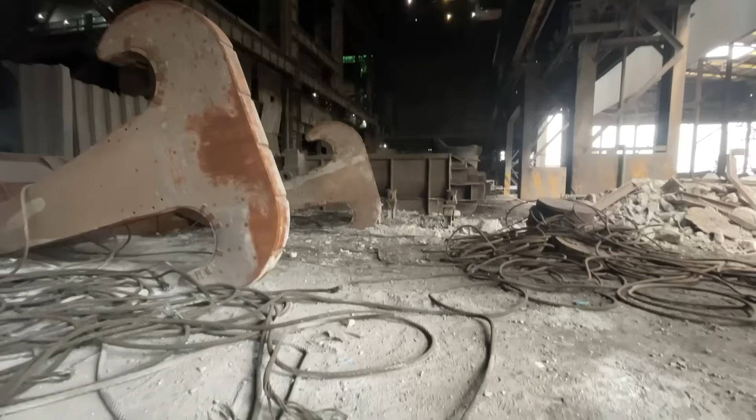The story we've been telling over the last 3 years through these podcasts and these videos is of a new industrial revolution. Where steel communities were originally founded around iron ore and coal, the opportunity going forward is to found those steel industries around renewable energy and the access to native scrap in the UK.

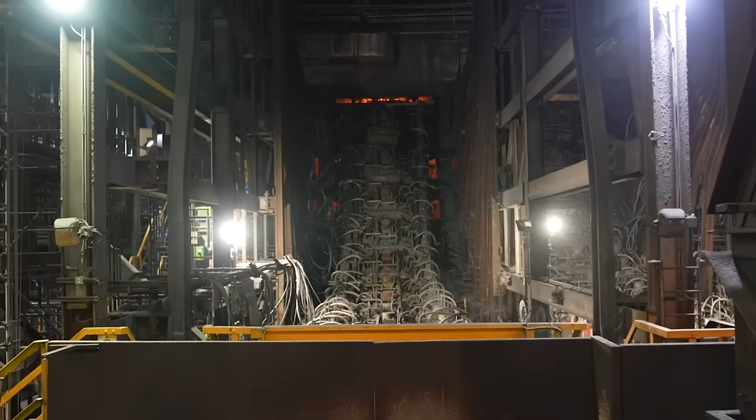Now, we all know now that the company here is investing £1.25 billion in a program of low CO2 steelmaking, and lots of people will know that that involves the introduction of electric arc furnace steelmaking technology here. But of course, on top of that, there's other things we're doing. So there's a life extension project for the casters, there's an investment in the crop shear and coil box in the hot mill, and there's a brand new pickle line as well as part of that investment.

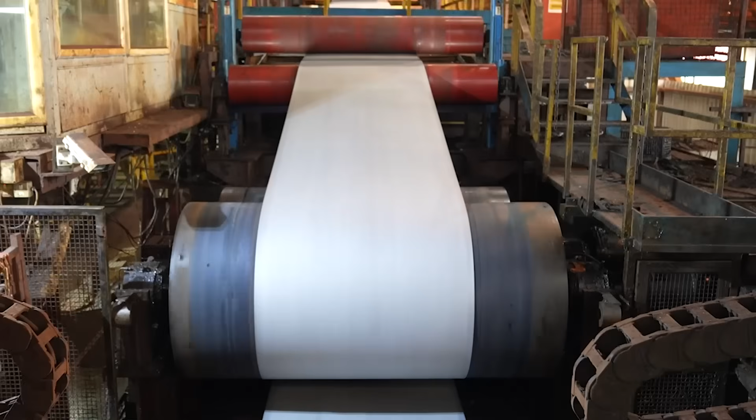This is one of Tata Group's mega projects across the world. There's Agratas, the battery factory across in Somerset, and the investment in low CO2 steelmaking here in Port Talbot. So I've been waiting 3 years really to make this podcast because we've been anticipating that project starting. Now we've had the contract signed with Tenova, got planning permission from Neath Port Talbot Borough Council. There's a few more things to sign off before we can get spades in the ground on the project in the summer, hopefully in July.

And so today we're going to be telling you the story, or the first part of the story, about that investment in electric arc furnace steelmaking. And who better to show us around what that's going to look like than the program manager, Peter Jones. Peter, listen, I've been really looking forward to this. Thanks so much for joining us and spending some time with us today. And I think we're going to walk around pretty much start to finish of steel being made on the site going forwards. But people may not have met you before, won't know much about you, Peter.

You're another lifer in the industry. Tell us a bit about how you got to this place today. Well, going right back to the start, I went on a trip as an undergraduate to the hot strip mill here many years ago, in 1990 I think it was, and I was hooked, strangely enough. It didn't take much really then to move on, and I joined the company in 1991. I actually started in the tin plate works in Ebbw Vale. I think you were there for a little while. Yeah, that's right. And really moved through the company through engineering jobs, operations jobs. Ebbw Vale has since disappeared, but I've worked at Trostre, and I've worked pretty much over most of Port Talbot Steelworks as well. Yeah, and of course you're a works manager in the steel plant where we'll be heading to a bit later on, so you know that place as well as anybody.

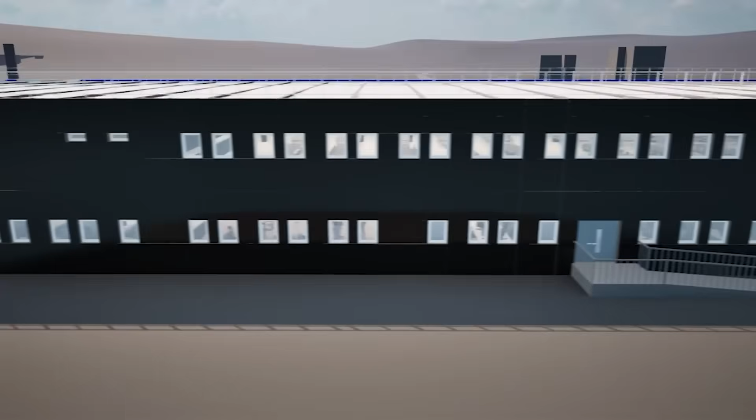You absolutely do, but there are points out there on the boundary of the town called receptors, and they're listed within the planning documentation, and we need to make sure that our noise levels are not above those that have been set previously from the site. So that has all been done and clearly demarked. And as I said, it's a massive area. There's still quite a lot of work to be done here from the summer to get this place ready to receive scrap. What will this place look like in a year or so's time?

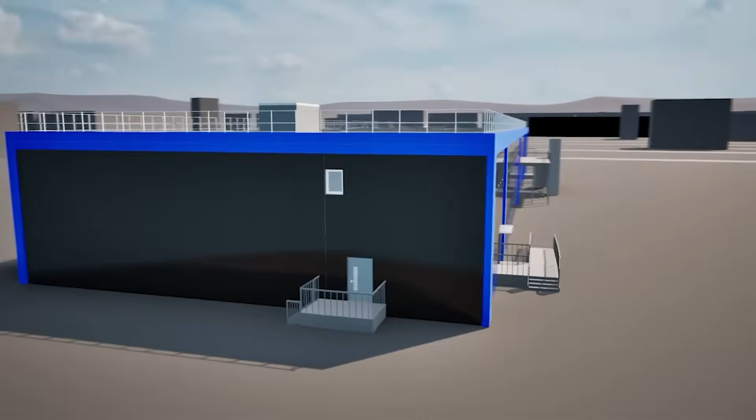Well, this has got a couple of uses for us, believe it or not. So firstly, when we get to the point where we're getting ready to mobilize the site, you'll end up with all of the amenities and the offices for the construction operations here, and all the car parking for the contractors and people who are working here. It's a short walk to the plant from there, and it's important that we give the people working on the construction project the best possible amenities and quality of working environment. So that's really important.

This area here, as we progress the project, we'll end up concreting an apron that goes all the way down the line so that we can use the machines to take the containers off the wagons. So this area has got roadways, a road layout. Wow. There is some processing equipment that we require to deal with material coming from our own existing operations, where scrap is yielded off the operations. It's incredible, really, isn't it? Because in my mind's eye, I was like, it's just a field, and you can tip a load of scrap there and move it over to the arc furnace. But the amount of work that's required is huge.

Yeah. As I said at the beginning when we arrived here, Peter, over your shoulder we can see the existing steel plant and the existing caster building. That's where the electric arc furnace is going to go. Now, that's quite a way away still, isn't it? I guess the scrap's still got to get from here to there. Yeah. Why don't we go to that end? We'll go to the BOS plant outside, and then maybe you can talk us through how it's going to get there. No problem. Great, let's go there then, thanks.

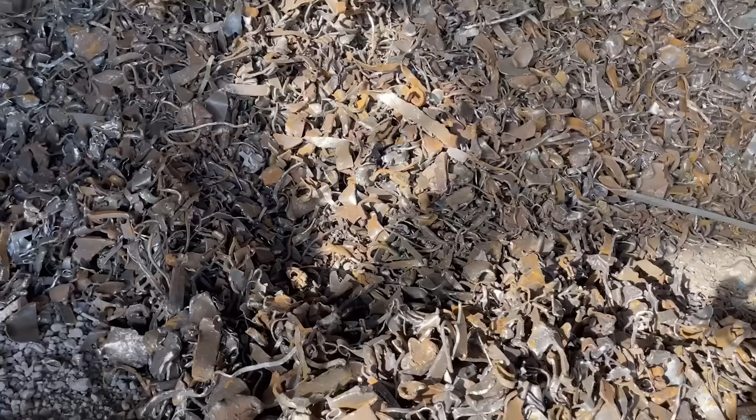Yeah, and I've seen the engineering drawings, and these two car parks in front of us for the casters, they're all going to have buildings and units on them, as you were describing. The building in front of us, which is the existing steel plant and casters, is where the electric arc furnace is going. There's a big shed on the left with a blue roof, which is currently the scrap bay. That was the old BOS plant scrap bay.

So on an integrated steelworks, the blast furnace operations, you would end up putting 18% scrap into the iron to make the steel. So that whole building was doing that. Now, obviously, what we're going to do is put a huge percentage of scrap in. So that's 70,000 tonnes a week that has got to be fed into the arc furnace in that area.

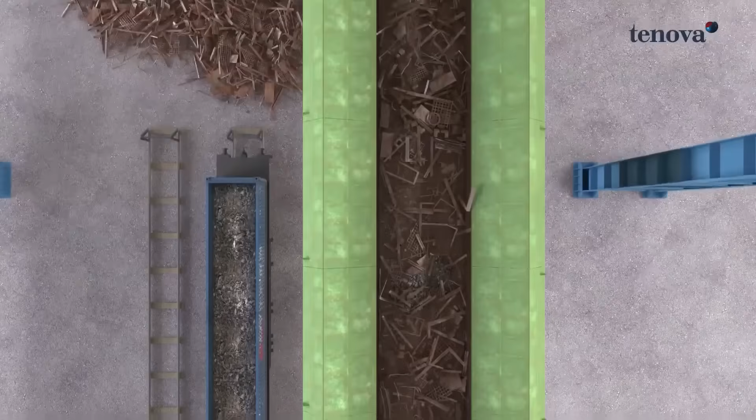So actually what we're going to do is knock down that building, and that whole line along the side of the lagoon is being flattened so that we can put a huge Consteel conveyor system in, and that will continually feed scrap to the furnace, and that really raises the throughput of the plant massively. So that's why we've chosen that design of plant to achieve that throughput.

Yeah, because I've spoken on the podcast before. My early career started in British Steel Stainless with an electric arc furnace. It was bucket fed. That's right. Electric arc furnace, and this is a conveyor.

And as you said, I've seen the drawings, I've seen the plans. People might be listening to the podcast and watching the video and say, "Oh, they're going to have a conveyor and they're going to put some scrap on it." This thing is massive, isn't it? It is, yeah. That whole construction, which goes alongside the lagoon as you described, feeding into where the electric arc furnace is going. Can you give us an idea of the scale of that?

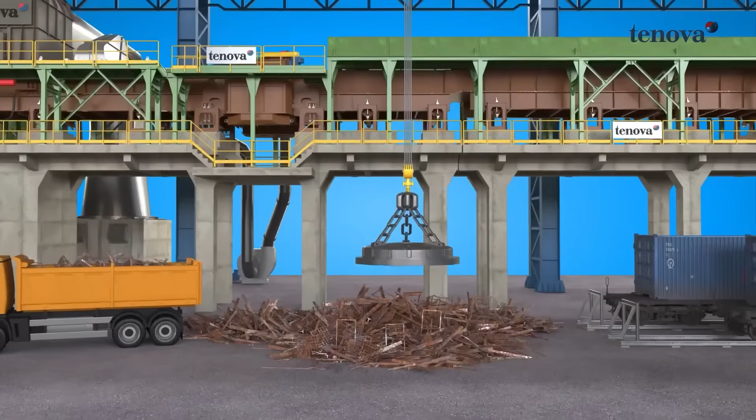Well, it'll be about 300 meters long for that conveyor. The actual building is, I think, about 20 meters wide. And we can store scrap inside that building, but also we have other conveyors that bring the scrap into that system. So that building also will have a couple of big cranes in there with magnets on to lift scrap.

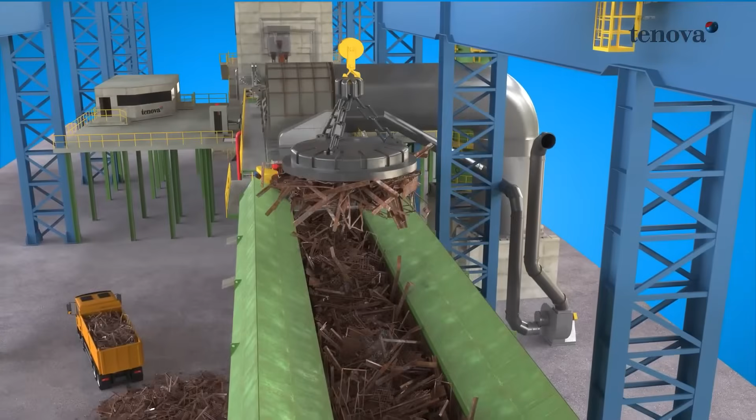So there's numerous different technologies that are used there to get the scrap to the furnace, and also to make sure that we understand how much scrap is getting to the furnace. So we'll weigh the scrap as it moves down the system to make sure that we're continuously feeding the process. The plant will be able to do about 400 tons per hour of scrap, to give an idea in terms of size.

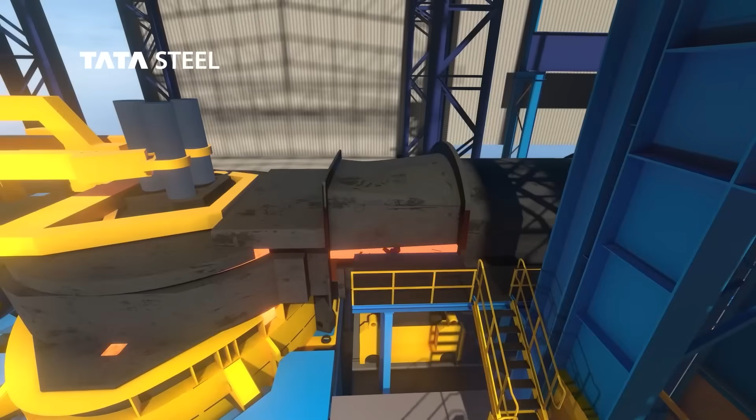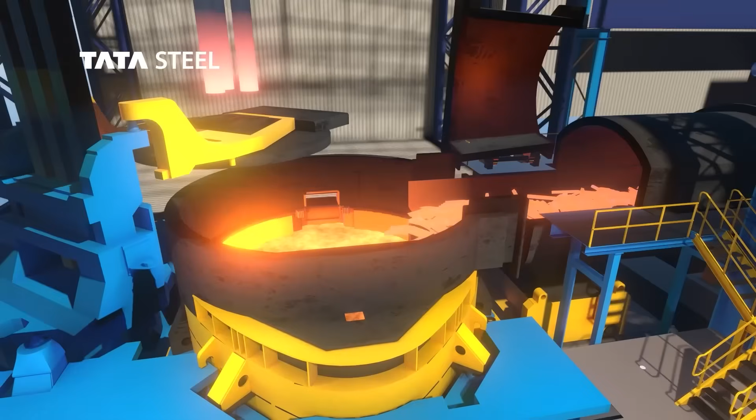And it's an incredible thing, isn't it? And I think I'm right in saying you mentioned that scrap gets heated before it goes into the electric arc furnace. That's integral. I guess that's just outside that building there, is it? Or is it within the building right next to the furnace? It's actually coming out into that new building, so that scrap will be preheated before it goes in. That saves us a little bit of energy in the process, which is obviously a good thing. Electricity as a result.

In terms of the rest of that bank, it will also be taken away to put a new fume treatment plant on that bank as well. At the moment, the team over there are removing about 5,000 tons per day from that bank as part of a drainage scheme that we're doing on this area. Yeah, this whole landscape is going to change radically. Huge.

Said the lagoon is going to stay, and I'm delighted because it's a beautiful place to stand actually and look across it, and it'll be fascinating to see that. Yeah. I guess the next part of our journey, Peter, is to go over to the steel plant and go inside where the electric arc furnace is going to be built.

Because that whole bay that you can't really see from this perspective, that whole bay going back to where the hot iron used to come into the steel plant, all that bay is changing. Right. It's all going to be used, yes. It'd be fascinating to hear from you what's going in there alongside the electric arc furnace. So, can we go in there now? Of course. Great. Perfect. Let's go.

So Peter, we're now stood in the bay where the electric arc furnace is going to be built. Just on our left is that blue shed we described before, which is the scrap bay that used to operate. And behind us I can see all sorts of stuff. There's the old scrap car there. There's some hooks for the ladles. There's a ladle in the background. And I guess where that ladle is, is pretty much where the arc furnace is going to be.

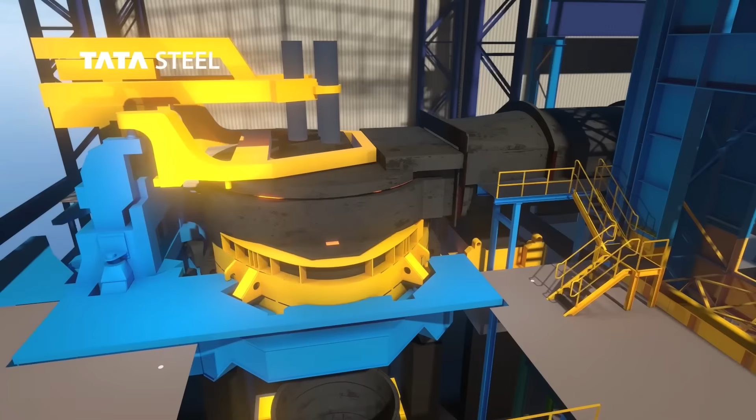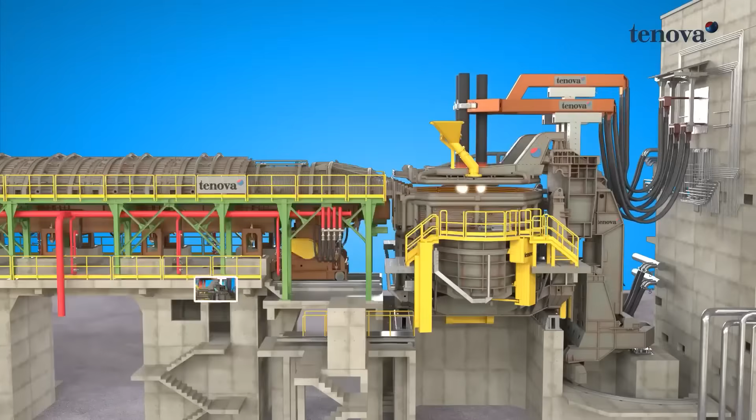And the furnace will tilt one way and the other, one to tap and one to slag the furnace off to remove all the impurities from the melt. Yeah. And then above that will be the floor where we'll operate the furnace. And further above that again, you'll have the mast. So the furnace has a mast which holds the electrodes. Of course, yes. And those electrodes move up and down into the shell of the furnace to create the arc.

And so the frame of this building stays. I mean, we're looking down there. It must be best part of 100 meters to the end of the building, and the building looks like it's 20, 30, 40 meters high. It is. That's all going to be full, but the frame's staying. That's right. This plant was built in 1968. It's a very, very robust building, and obviously we're checking it, and it has had lots of checks done to make sure that it's suitable for further duty.

But we're also going to extend the building out that way as part of the development to provide more space on that side. So this area has got a huge amount of work going on in it at the moment, as you can see. As you said, here are the old hooks that used to pick up the 500-ton ladles in the bay. And all of this is going to be cleared now, ready for construction to start in July.

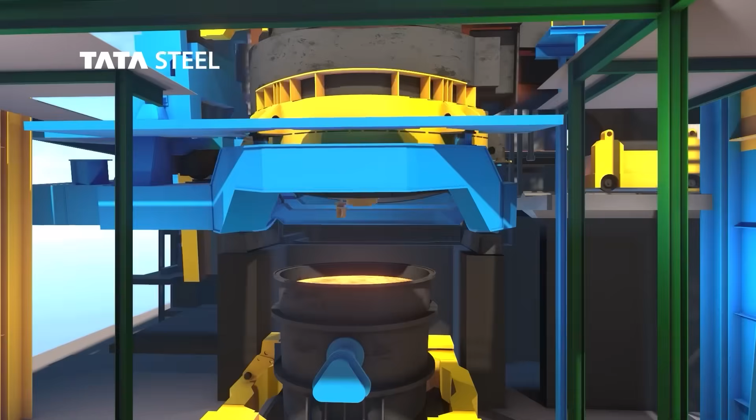And where we're standing, Peter, am I right in thinking that the ladle, once full of 300 tonnes of liquid steel, comes up towards us? It does. And then what happens to it? So underneath the furnace, the ladle will sit on a car, and when that ladle is full of 300 tonnes of metal, the car will come out from underneath the furnace. We'll pick it up then with one of the large 500-ton cranes here.

And then we will transport that down the bay to this area over here, and then bring it through into what we call the teeming bay. And in the teeming bay, that's where we do all our secondary metallurgy. That sets the grade of the steel, it sets the temperature, and then we can progress that into casting.

Yeah, and I'd like to walk through there in a minute, because I didn't mention it earlier, but part of this investment is not just the electric arc furnace, but two ladle metallurgy furnaces, which is the secondary steelmaking, which is across in the next bay, in addition to some of the assets that we currently have in there.

So let's take a walk across there. Before we go, I'd like to go up onto the stage, the existing BOS stage, because I want to talk to you a bit about this concept of having a spare shell for the electric arc furnace, because I think a lot of people will struggle to understand that. But it'd be interesting to see where it's going to go and how that's going to work. No problem. So I guess if we go that way, that's right. The stage. Let's go. Yeah, perfect. Thanks.

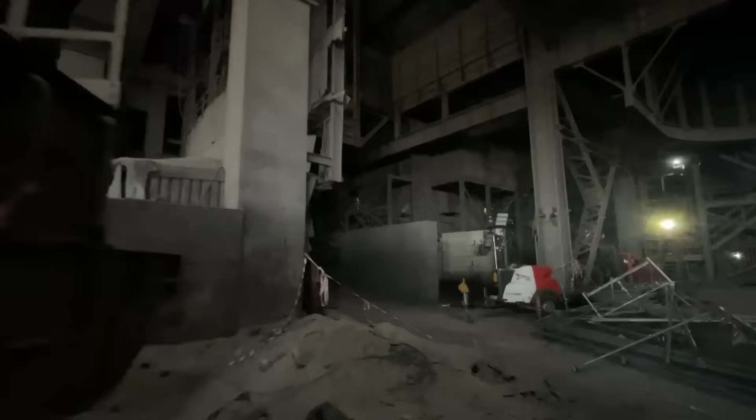So Peter, a little bit out of breath, we've climbed up from the bay where the electric arc furnace is going to the stage. So this is where the two BOS converters have been operating for as long as we've known them. Obviously now ceased operation. But this other end of the bay, the north end, where traditionally hot metal came from the blast furnaces and the torpedoes was put into a ladle, desulfurized before it went into the converters. This end of the bay is not redundant, is it? There's some stuff happening here as well. Tell me what goes on here.

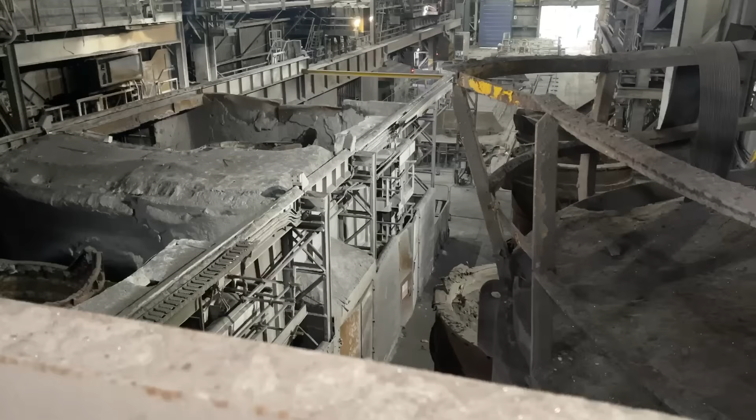Believe it or not, we need the entire length of the building, and it's a huge building. It's a cathedral, isn't it? It really is. In the south end of the building, as you said, we've got the electric arc furnace. You're going to be moving hot metal ladles when the plant's running. But then the rest of this bay is required for other aspects of maintenance of the plant. One of the biggest ones is that we have to, on a very regular basis, change out the shell of the furnace. That shell at different times can contain 480 tons worth of metal. And the refractories inside that shell are very thick, but they do wear from that kind of intensity.

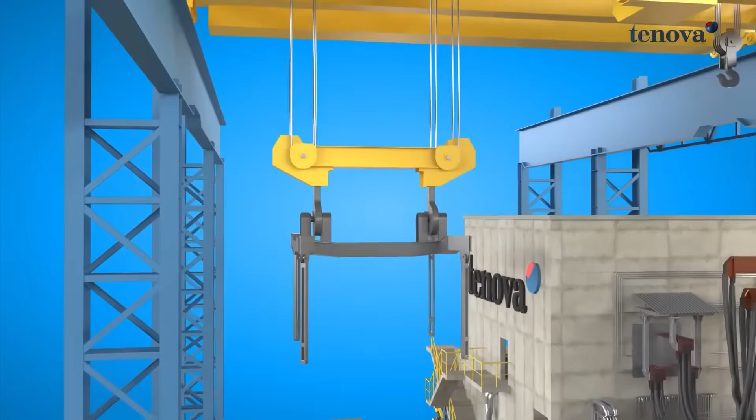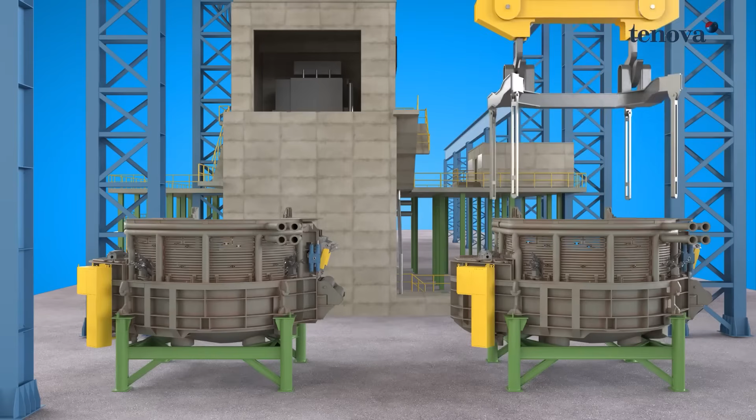So every couple of weeks, when the plant's in full production, we have to change that shell out complete. Wow. And then we put another one back in. The crane that we'll be using will be rated for that, something like a 580 ton potential lift. And that will, every 2 weeks, change the shell, put a new one back in with new bricks in, so that the thing is safe and we carry on running. So it can be done very quickly because it's designed for that. It allows us to change a shell in less than 8 hours. That's the way that this will be done.

And it's interesting because you talk about it as a shell, and people might think, oh, like a shell of a crab. But when most people think of an electric arc furnace, they're probably thinking of that shell. It is kind of the whole furnace without all of the... Literally the whole furnace comes out. So you're left with the frame that it sits in, that tilts it. As I said, it has to move backwards and forwards. But the actual shell of the furnace, the bit that retains the metal, injects the oxygen, delivers lime, all that will be coming out and being replaced once a fortnight. So we're having two effectively, aren't we? We are, yeah. So that's what this end of the bay is for.

And the refractories for the ladles are also going to be at this end somewhere? Yes, all of the refractory maintenance will be at this end of the building, and it makes it quite a neat setup. We can keep the personnel who do that together. Yeah. We have the flexibility that confers, and also it keeps the environment in the right state for doing that activity. Yeah, it's going to be a busy old place, isn't it?

Yes. And I know people feel sad about the end of traditional steelmaking in this bay, and it was busy from both ends. But in the future, it'll also be busy from both ends. But I'm guessing there won't be that many people about because it'll all be controlled from a pulpit somewhere, will it? Yeah, the pulpit will be down there, and it'll be a combined control area with the ladle furnaces that we're about to go and have a look at, where they're going to go. And yeah, there are less people. Unfortunately, that's the way technology moves, and we see that in many industries.

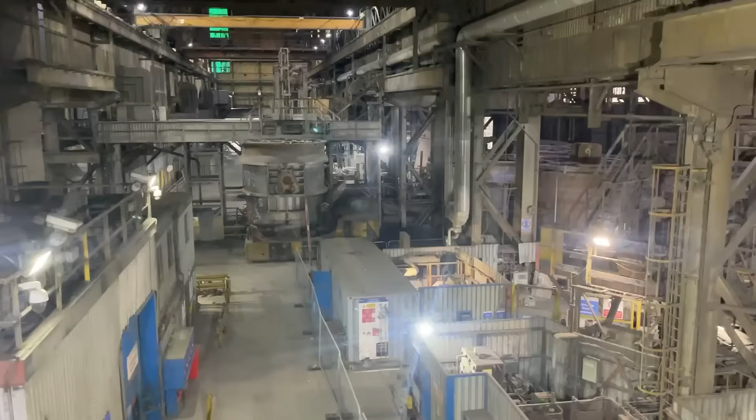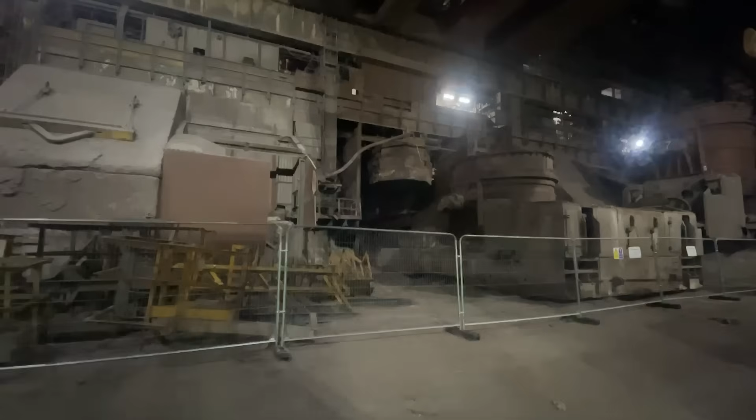Okay, so Peter, we are in now secondary steelmaking, the teeming bay, I think you call this. That's right. And, you know, as far as the eye can see, both sides really is equipment, ladles, the teeming bay ladles, and some existing secondary steelmaking. Talk to us a bit as we walk along about what we've got here, what will be staying, and the new 2 ladle metallurgy furnaces.

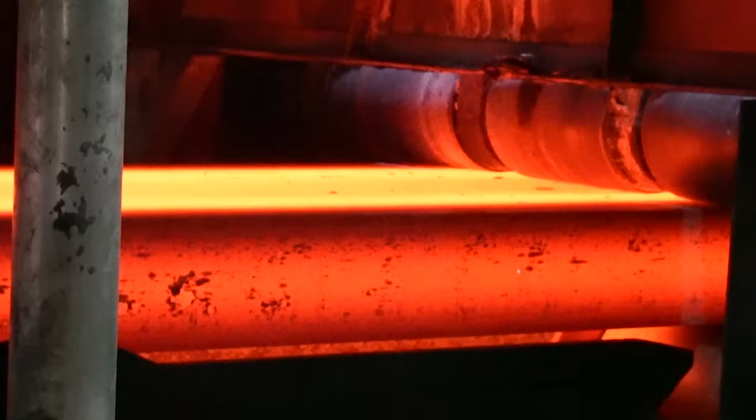So on our right-hand side is where the steel will be coming from. The ladles from the EAF will come through into this bay on a car. They'll then be picked up by another 500-ton crane and moved down to the ladle furnaces. And we've got 2 ladle furnaces that we're going to install. And the reason why we've got 2 and not 1 more furnace is because it provides us with a lot of flexibility in the operation, and it allows us to use the 2 existing casters here to actually process more steel. So it increases our opportunity to make volume through this plant, and it's really quite important.

So running an EAF, ladle furnaces are very important in the whole process cycle. It allows you to set the temperature really, really precisely to then go to the casters, which again is part of our process, but it means that you don't waste energy or waste money in terms of setting that.

But also, we'll still make many grades through this plant, steel grades, and that means setting chemistry. So you might be adding manganese, chrome, all sorts of things will be added as alloys to the steel that we produce on the electric arc furnace, dependent on the end customer. Those end customers have different metallurgical requirements, and we have to cater for that. So it's a key part of the argument about the business being able to supply the customers and the markets it currently does. We're investing in these ladle metallurgy furnaces that will enable us to refine the steel, for want of a better word, to those grades.

Now, before we go on in a bit more detail, I know we're talking to some people around the business and outside the business, and they hear the word furnace, ladle metallurgy furnace. They think of something that's going to be the size of a blast furnace or the size of an arc furnace, but these things are the size of a ladle. Would that be fair? That's right. They're akin to an EAF in terms of them having electrodes, but it's a much lower power activity.

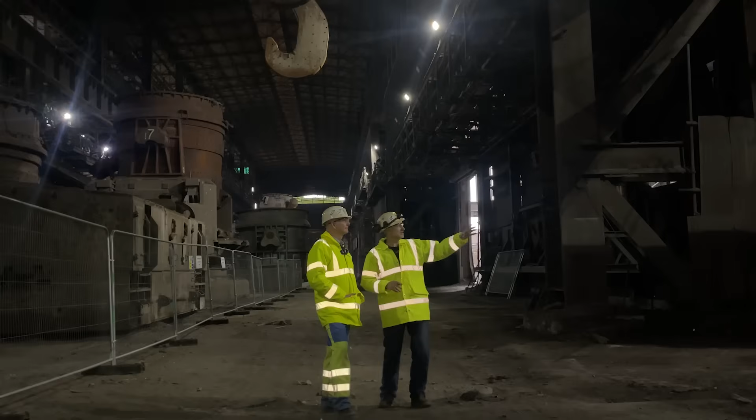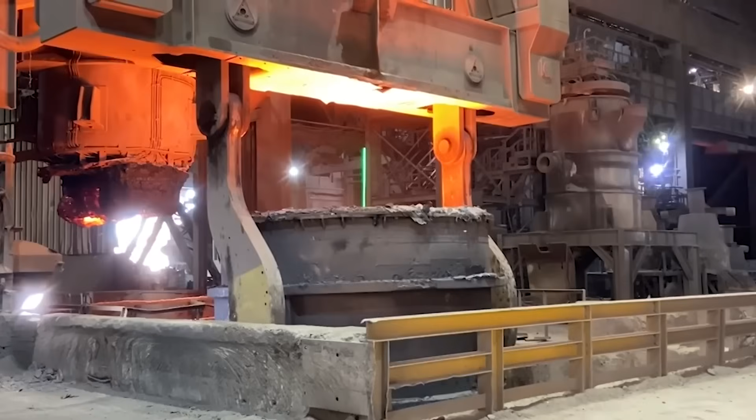And of course we are keeping some of our existing secondary steelmaking. As we walk down the bay, just to our left, there's like a giant tunnel, for want of a better word, which takes you through to the casters. But this also has a piece of secondary steelmaking, which we're keeping. Why are we not just converting from one to another? When this plant was running as a basic oxygen steelmaking plant with the blast furnaces supplying the iron to make the steel, this bay had 4 secondary steelmaking units in it. And effectively what we're doing is we're building 2 new ones which suit the EAF process, which are the 2 ladle metallurgy furnaces.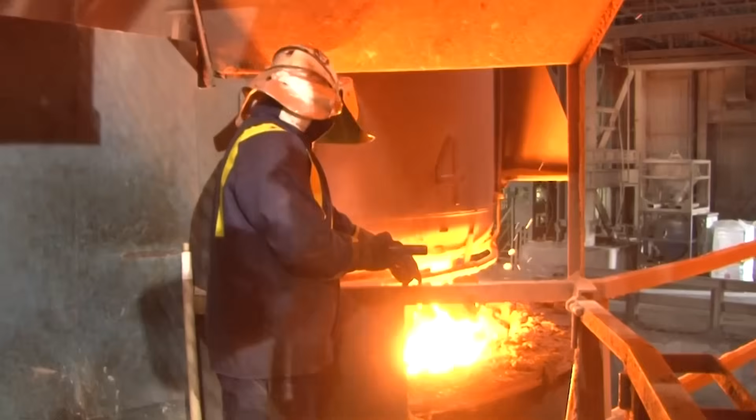I'm going to keep 2 of the existing units which have been here for many years, which is CAS2, which is what is in front of us here, and another plant called the RH degasser. And they again provide us with flexibility in the operation to the casters in terms of making sure that we can supply at the speed and rate that we want in terms of production, but also the RH degasser gives us a wider product range. And that's really important. We obviously want to make sure that we can be as flexible as possible as things progress and requirements change over the years.

Yeah, sure. Now, it's really so fascinating to hear about everything that's within your remit as a program manager, because it's unbelievably massive. And we stand in this cathedral of a building, but it's 3 almost next to each other. You've got the main steel bay, you've got the teeming bay, and you've got the casters, which is also part of your responsibility. The life extension project to the casters that we've spoken to Rob Deeney about before. It's quite difficult to get your head around the scale of this project, Peter, if I'm honest with you. Got a lot of work ahead of you. Absolutely. How are you feeling?

But we've got a great team. This is not done with one person. It's not done without a load of great people, many of which have come from this actual operation here. Or they've come from the blast furnaces. We've got a team of, I have to say, really can-do people. What we've got to help them with is the project management, project engineering; they've been doing operational roles with us. We now need to make them into great project engineers, project managers. I have absolutely no doubt whatsoever that they will be fantastic. It's just not even something to consider that they won't be able to do it. So I think that we've got a great team.